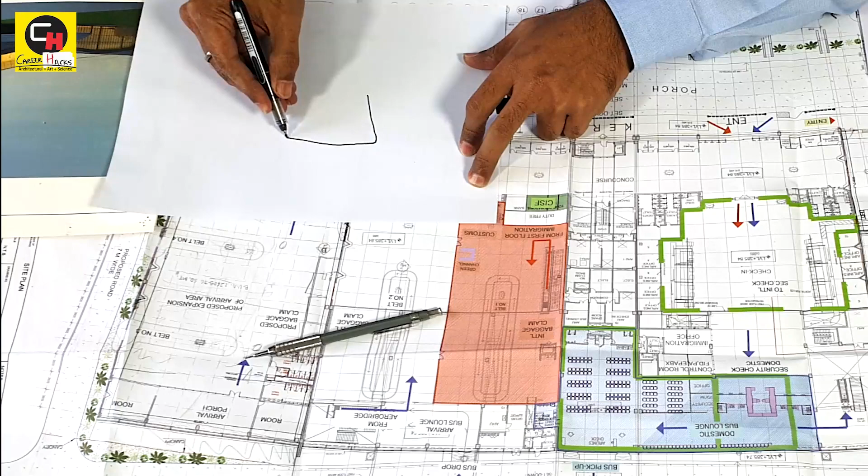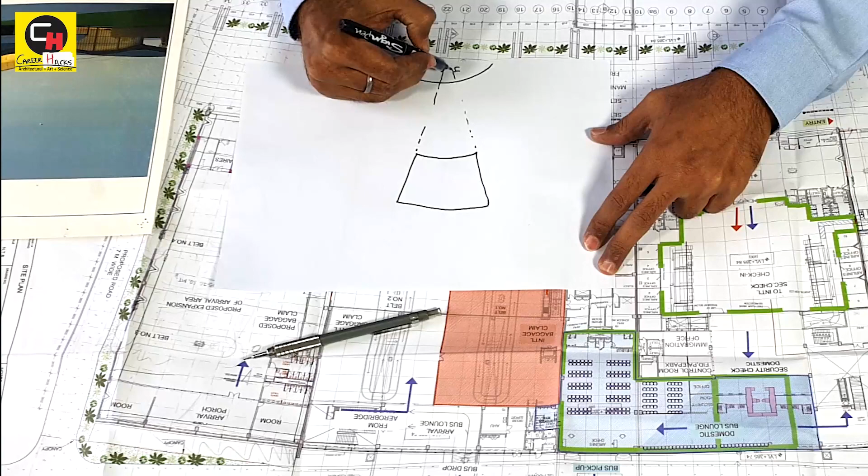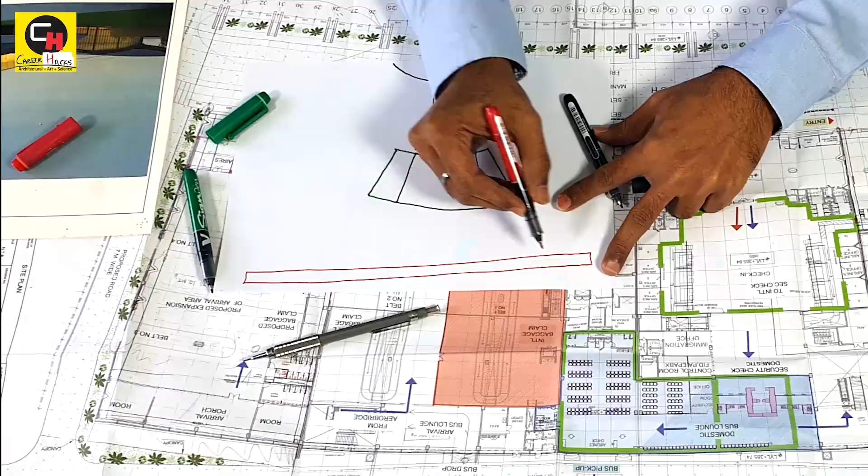building that is there. Those who are familiar with Jaipur, we have Jawahar Circle. It's a big circle right next to the airport. The center of this building, as you can see, lies somewhere in Jawahar Circle. So we were supposed to do the expansion on this side and somewhat on this side. The taxiway, or the runway, is like this, which means the landing and takeoff takes place in this part, and then the flight does taxiing like this and parks like this.

Now, since we are supposed to do the expansion on these two sides, let me tell you what is happening. Right now, the terminal building is somewhat like this. This side of the building is departure. This side is arrival, which means if you want to fly out of Jaipur, you would be somewhere in this part of the building. When you are coming to Jaipur, you are going to land or enter the premise of Jaipur in this part. And here we have got pylons and the canopy. So we were supposed to do the expansion in this part. Let me write it: future expansion, future expansion.

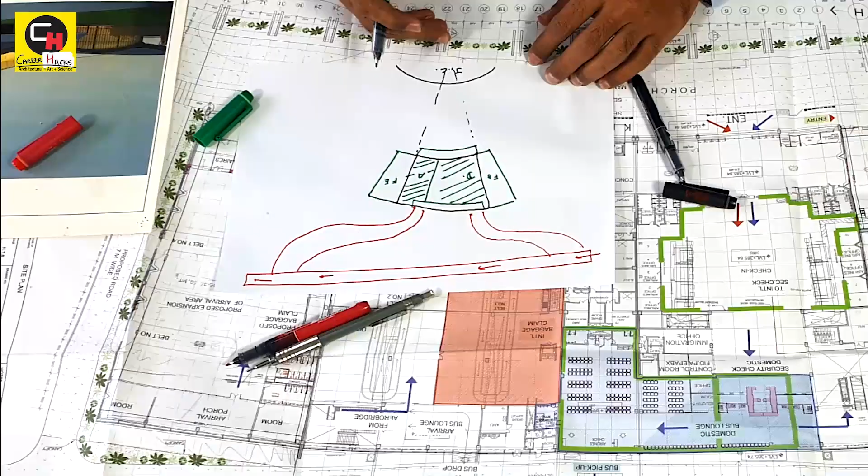Now, as you can see, the building form is slightly radial. And the expansion had to be done on the left and right, which means the arrival was supposed to come on the right side along the existing arrival, and the departure was supposed to come on the left side, adjacent to the existing departure of the building. So this was the basic format, and that was the feedback. And we didn't have to add the aero bridges, though the aero bridges are located somewhere over here.

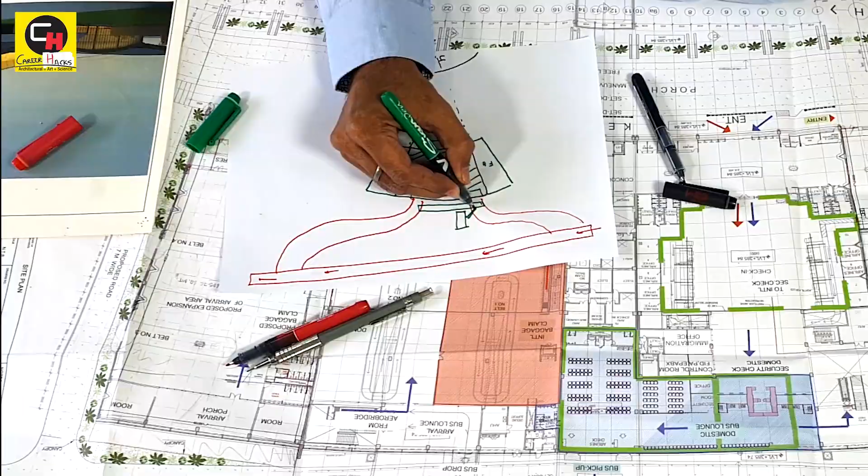An aero bridge basically is a platform wherein you can directly board the aircraft, and you don't need any bus to go towards the aircraft. So the aircraft comes and parks over here, and you can board the aircraft directly, maybe from this point and maybe from this point. So that's how it happens. I hope the basic plan is getting clear to you, what the basic inputs were. Now let me come down. This is just a planning explanation of it.

Now let me show you how the existing building is in sectional format, so that you can understand the topography of the building. This is the ground, then this side is the arrival, that means taxi drop off.

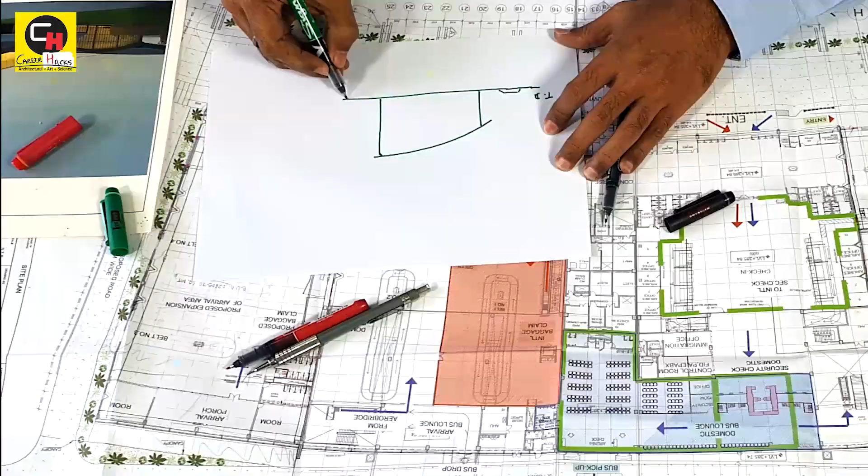Then the building is somewhat like this, and then you have the aero bridge which is standing over here. You have the ground floor level, you have 6 meters level, we call it 6 meters, and then you have the 10 meters level.

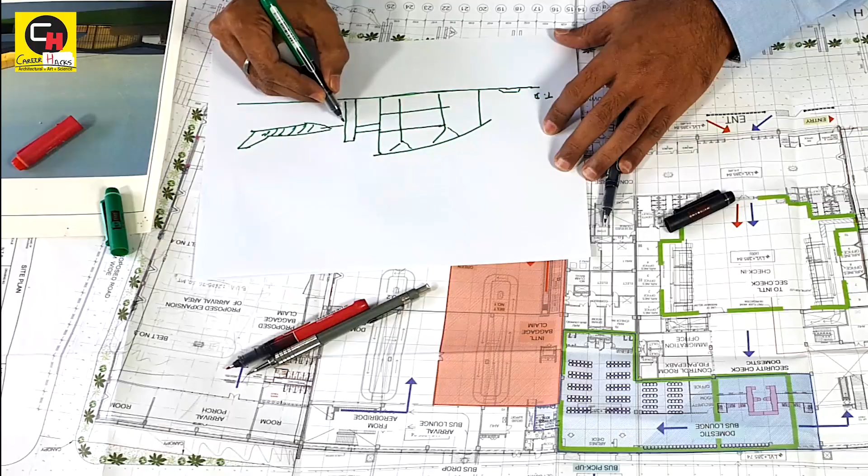So it is somewhat like this, the existing terminal, and then the aero bridge connects like this, and the aircraft parks somewhere in this point. So you board the aircraft like this. So now this is the existing setup of the terminal, and let me show you the actual plans of how the things are happening in the terminal right now.

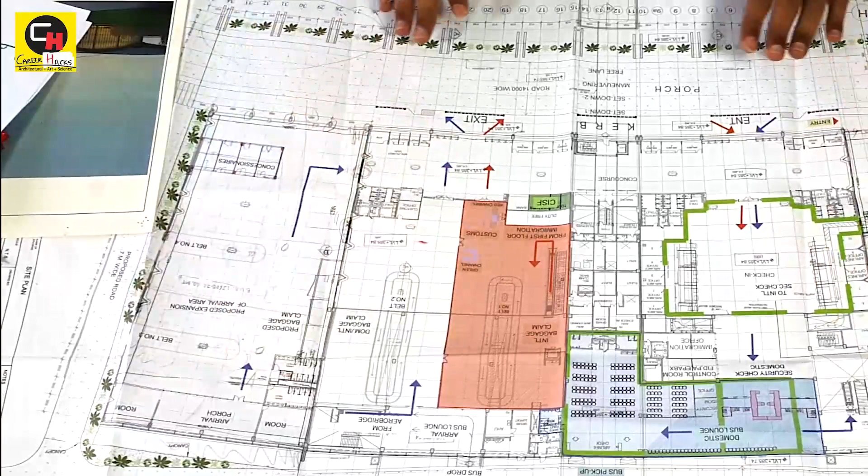So friends, this is the architectural plan of it. As you can see, till this point is the existing terminal. As you can see in this, the arrows are marked. You enter the building from here, you have a security check, then you have the immigration office, then you have the domestic lounge, and then either you get a bus pickup from here or you go up further for the actual departure or the immigrations.

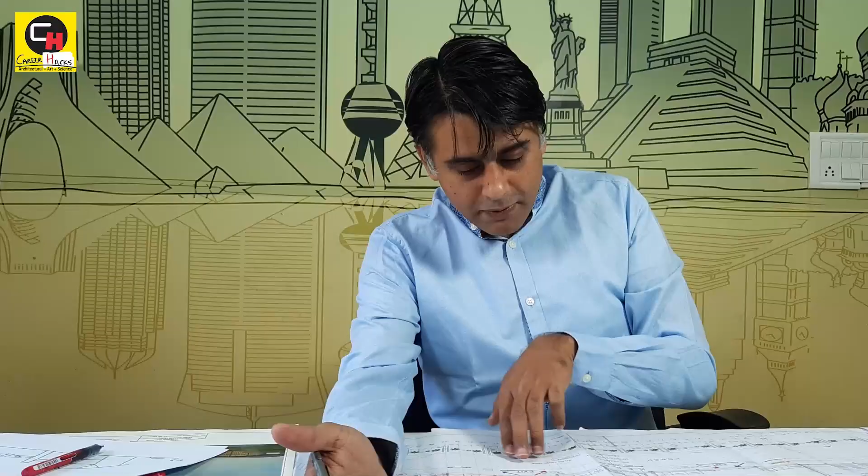Then you have the arrival terminal, which is over here. There is this one belt, there is this second belt. So your luggage comes over here and you check out from this point. So this is the exit. Now the addition to the building had to be done in this area and in this area. This is the arrival part which we designed.

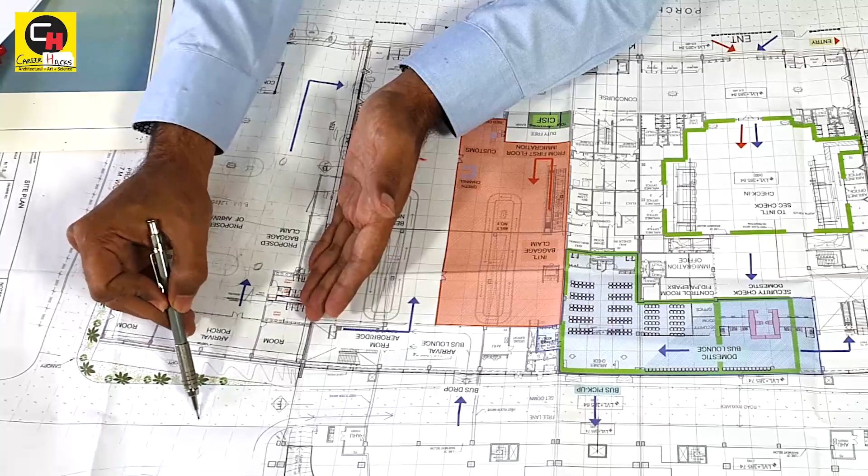So the arrival part which we designed had to have 3 belts, the carousel. So you can see the belts which are coming over here, and then you have the arrival porch. The bus which used to come parked somewhere over here. So you get down, you enter the building, as you can see in the arrows, and then you have a toilet block. You come in, either you go out from here or you enter the main arrival and then you come out of here. So there were 2 possibilities. So we had designed it accordingly.

Now coming to the departure. Departure is supposed to be in 3 levels. One is the 00 level, where we have the check-in counters, and above that we had 6 meters level, which further added to the main building, and we had a 10 meter level. In the 10 meter level, if you go directly, you were directly in a position of getting towards the security tunnel and then boarding the aircraft. So that is the basic knowledge which I wanted to give you about the entire terminal.

Now comes the actual designing of the terminal. As you can see, this is approximately, let me start in feet only, because mostly people are comfortable using feet as their dimensions. So this is around 71 meters, which turns out to be around a 220 foot linear building, which was supposed to come. And this part, though it is not big, is around 25 meters.

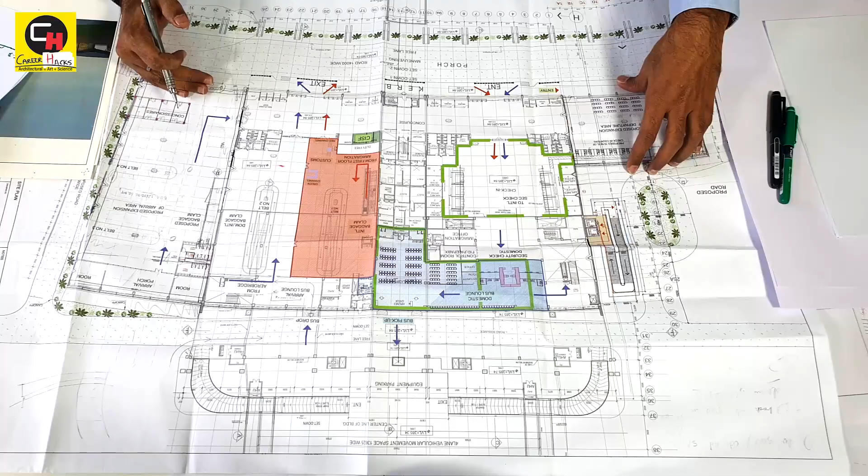So the original objective was to make a hall in such a way that least interference is there. The structure was supposed to be designed in tubular framed structure. That means we were using box sections, metal box sections, IS metal box sections, and developing the entire terminal. I had a philosophy of making a curvilinear building. So I wanted the span to be as open as possible so that once the person arrives from here, he sees a long integral building which has least interference in it.

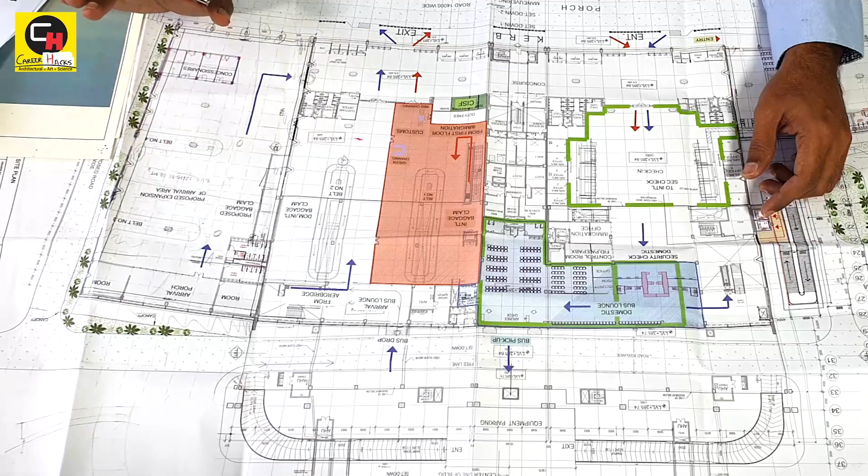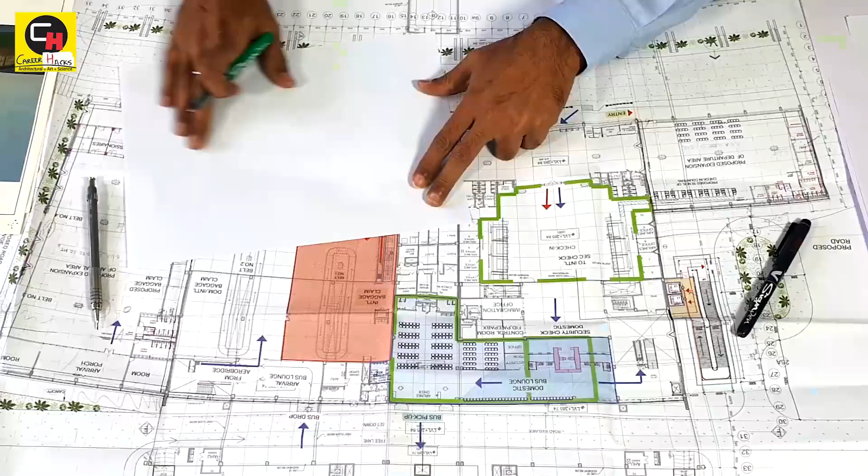So what I wanted to do was to make an absolute columnless building, but while using the tubular structure, we had a limitation that only 100 feet length could be achieved at a time. So let me come down to the sketch wherein I'll show you the concept which we did for developing the arrival. So as you can see, this is the existing terminal, like this. Now, my building was supposed to come in this area.

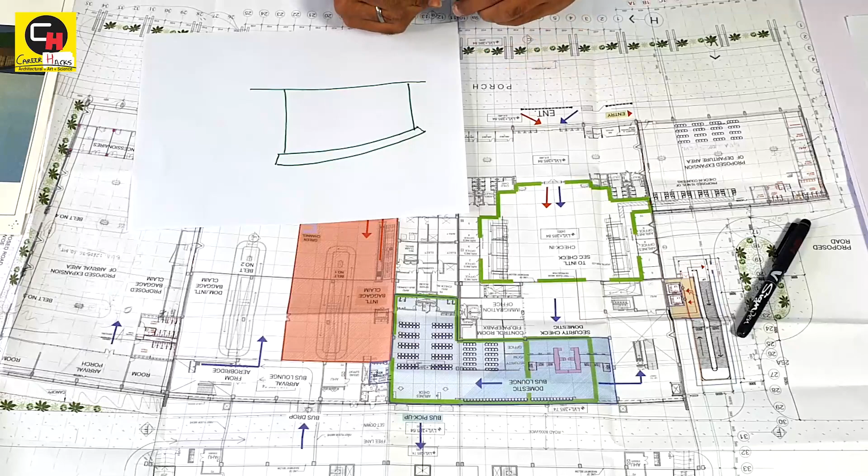What I did was, somehow when you land from the air, you always like to see a curvilinear or a fluidic building because that gives a better impact. Now, in this particular case, I didn't have the liberty of designing what I wanted, the curves the way I wanted, because we had an existing structure. So I took the formation of the existing structure and I wanted to create a separate identity of my building as well. So how can we do that?

So we took this formation, and since the height was not supposed to be that high, I did two interventions. Option 1 was a fluidic building, like this. But then this had a disadvantage, a very practical disadvantage, which Airports Authority of India told me. Once it rains, we have two collection systems.

One, the water would come down and fall from here, while the other, the water would come down in the center of the building and the water would drip like this. That was a practical problem. That water might collect over here and the building has to be in a metal, so it might start seeping from this point, and nobody wants to see a dripping airport.

So what we did was, we took a different formation and we curved the building like that, like this, and then we had a small arrival canopy, and on the other side, since we had a pylon system,

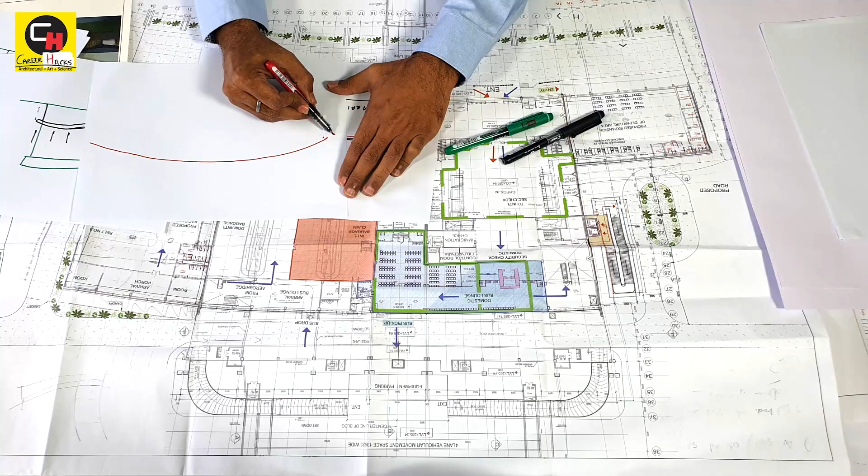Now the same case was in departure also, we had to maintain the same trajectory. So that is what we did, but we'll come to the departure in the second level. Let me tell you one more thing. This is a huge structure, and the beams, the girders were almost 1.2 meter, that is 4 feet deep at both the ends. So if this is a huge curve, and this is called the tangent. So in this part, this particular curve behaves like a straight line.

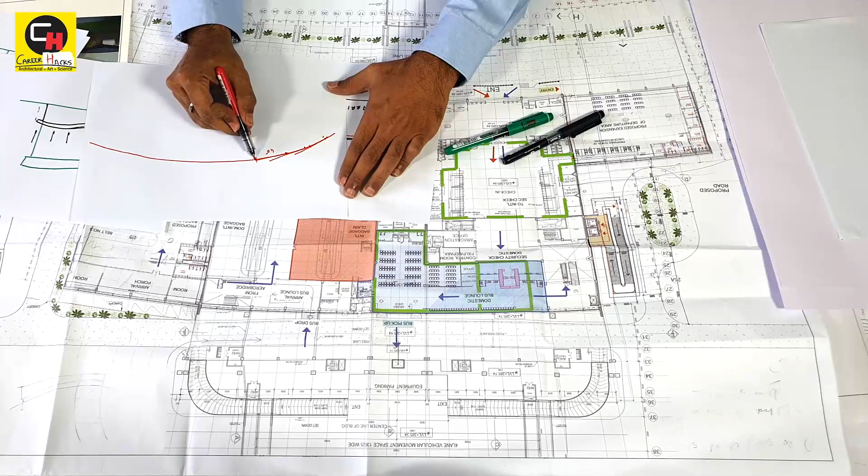What I did was, I actually managed the length around 40 feet, which is approximately the length of an individual box section. And we used straight lines like this and divided the entire curve into straight lines. So that was the basic engineering technique we had to use in this building, rather than making a single curvilinear structure, which had a technical limitation sitting in Jaipur and considering the cost constraints of Airports Authority of India.

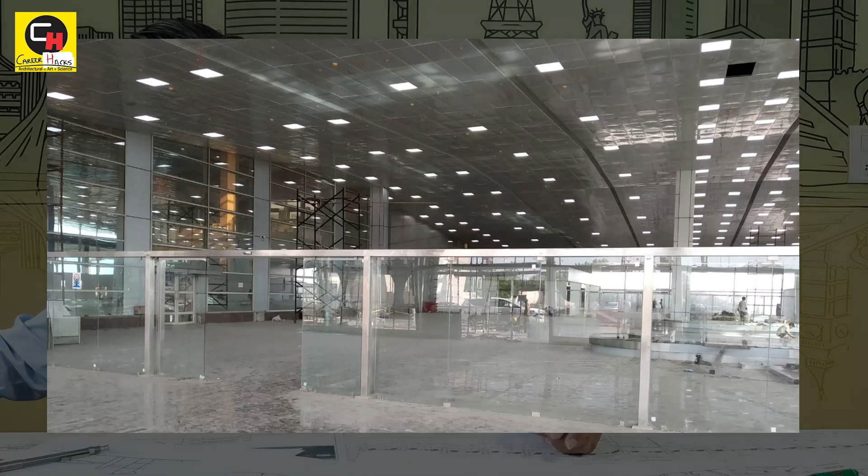So as you can see in the structure, you might feel like this is pretty straight. But actually it is not. We have used different tangential sections and placed them accordingly. So coming to the other image of it, as you can see, this is during the completion of it. The curve is starting to get obvious, and as you can see, the immense depth of 220 feet, with a single column span, around 100 feet of depth with a single column. So that's how we conceived this building.

Now the other challenge was to incorporate the other services which are very important in airport buildings, namely the HVAC, the air conditioning, the use of glass facade. The existing building had a glass facade, and we had to integrate that glass facade in this building. It had a special character.

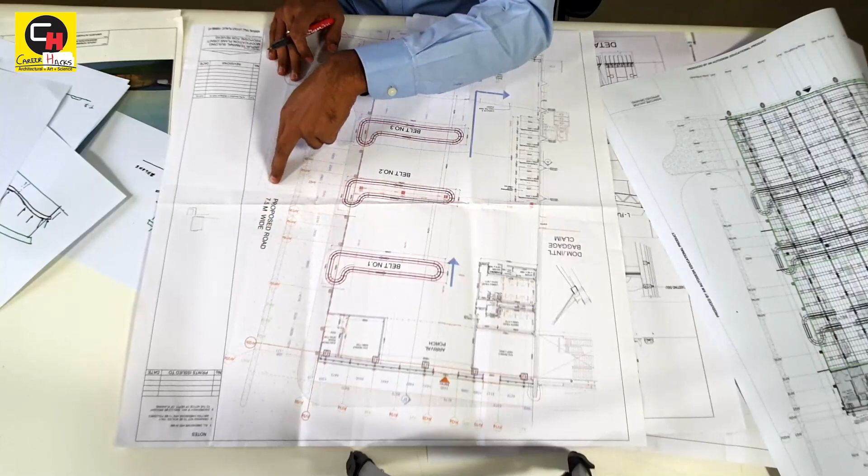And we had provided some of the concessioners. So if you are coming out and you want to take flowers for your girlfriend, you can always do that from these concessioners. And then, how does your luggage come in? So a tractor trolley or maybe anything will bring down your luggage, drop it to the respective belt, and the luggage comes over here, and the belt rotates like this. And then you can stand around and collect your luggage from here.

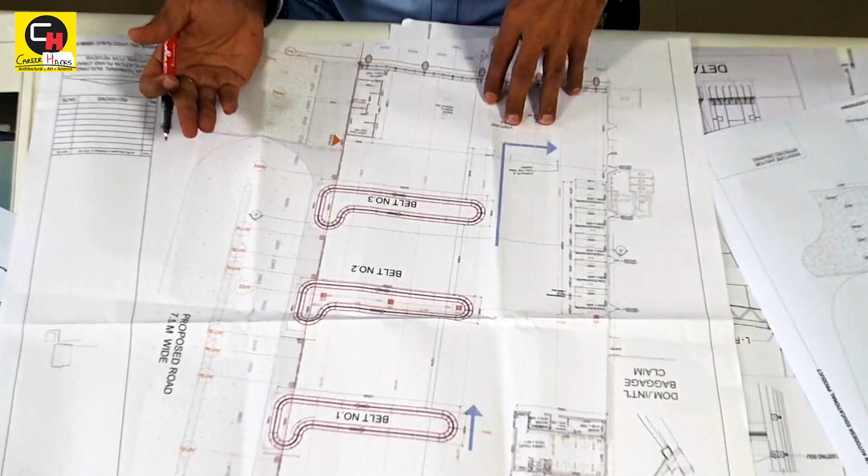Then you come out. We have a small visitor area as well, wherein if your girlfriend or your friend is coming, they can come in, stand over here to meet and greet you, and we have small kiosk counters over here, and then you come out and then you go. So this is the actual architectural plan of it.

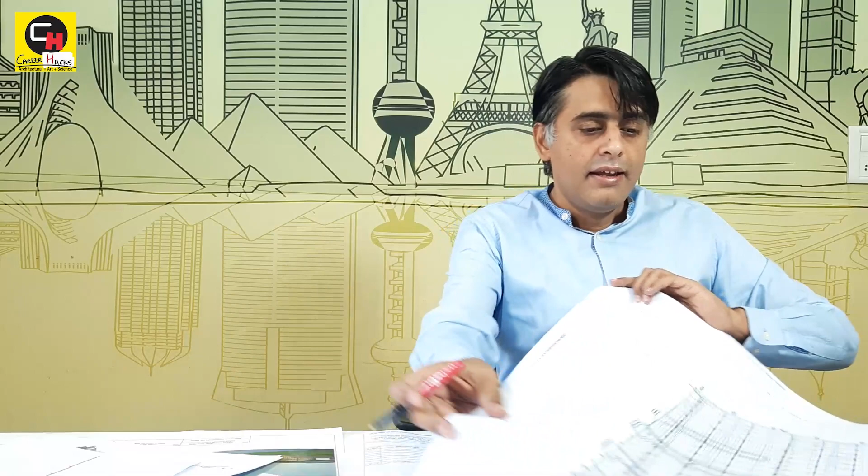Now coming to the detailing of it, the most important character, as you must have seen in my previous sketches, the roof was curvilinear to accommodate the ceiling. Ceiling in this particular case, we had taken Armstrong metal ceiling, and this was a curvilinear building. As you can see in the plan, let me put it in the same way. This is a curve. This building has two curves basically. One is in the plan, so it is radiating like this, and one is in the section. So that is very crucial.

When you design these kind of buildings, the false ceiling becomes a very tedious element. But again, there was a cost constraint. So we, however, managed to use this ceiling, but to do it in a curvilinear format was getting very expensive. Again, we had to use that tangential technique in the ceiling also. And we actually developed an indigenous way, our own way of ceiling detailing, which I'll show you in further coming drawings. So these are 600 by 1200 mm ceilings. So 600 by 1200 is 2 feet by 4 feet ceiling. So we did 600 by 1200 ceilings

after every 2 blocks, since the curve was radiating, so the building was changing its dimensions. So we started to do the ceiling from the center. As you can see in the center, this, and it keeps on rotating. But since the grid had to be kept straight, the entire difference had to be taken out in the center. As you can see, the last grid keeps on changing its formation. So we had to actually cut the tiles while placing them on both the corners.

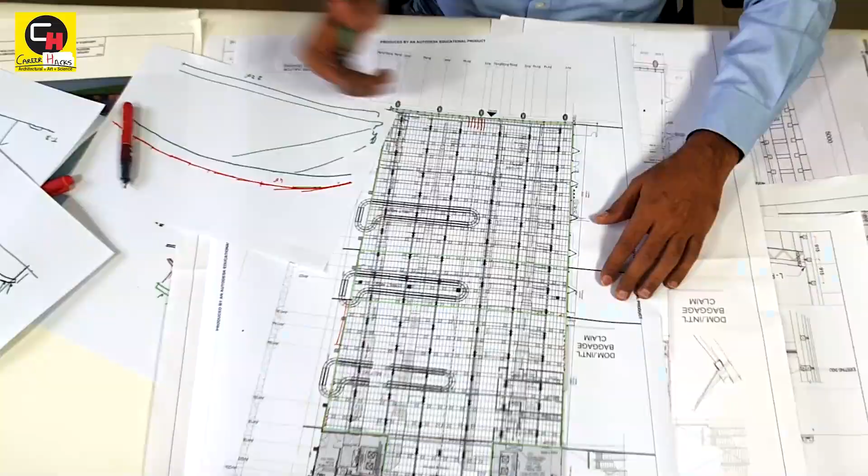Now the other challenge was to embed the air conditioning. As you can see in this particular line, you can see the ducts running. So this is first AHU. So this duct, as you can see, is coming over here. It keeps on reducing and it comes till the end. Same is the case in this ducting. So the ducts start from here. It keeps on coming like this up till the end, so that the ambient cooling is same throughout.

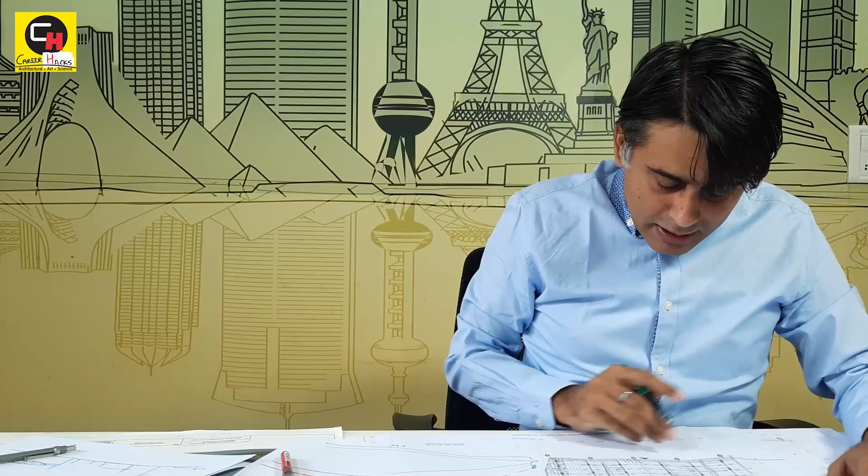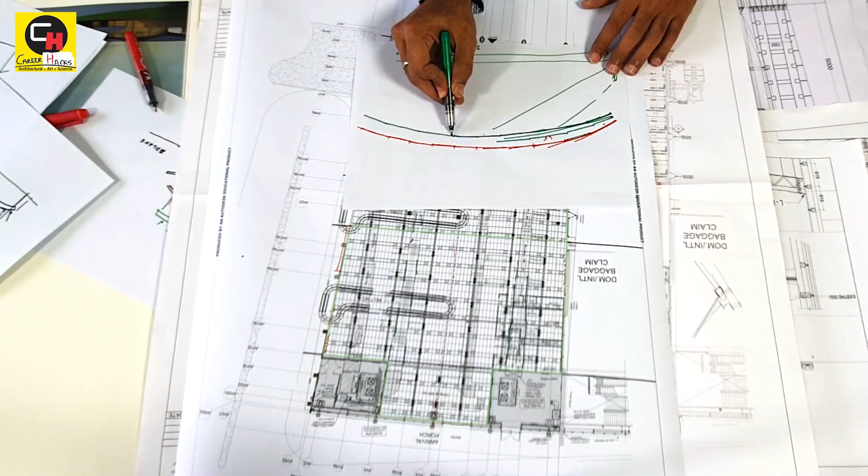Now again the problem was the curve. In this case, as you can see, the curve was there, so we had to keep the ducting again in that tangential aspect. So this is how we placed the duct. And the grill, again the grill can't be curved, so we took 10 feet grill pieces and we placed them in the tangent. So the grills were straight, but while arranging them, they look like a giant curve.

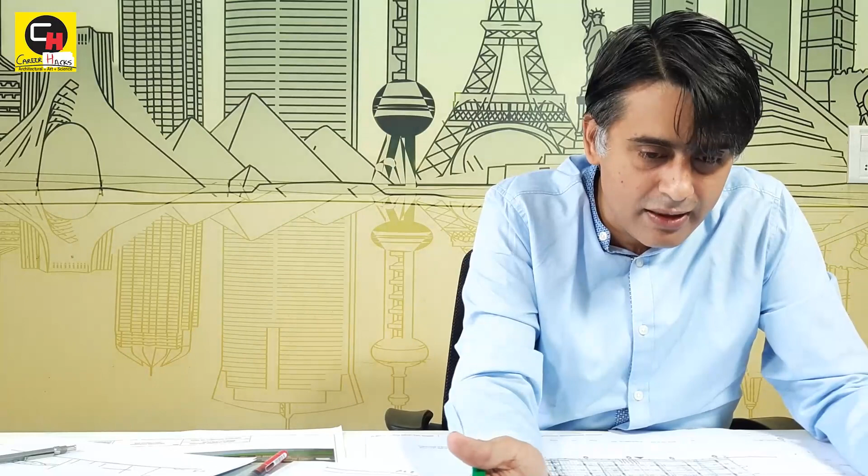So as you can see in this, we had a linear pattern of diffusers from which the air comes out. This one, this one, this one, this one. And here we had alternate grid pattern, actually, the grill pattern. Here we do the throw and here we collect. In the same case, here we do the throw, here we collect. Here we do the throw and here we collect. So that is a complete cycle. In HVAC, we have to maintain this cycle in order to keep the temperature of the air less.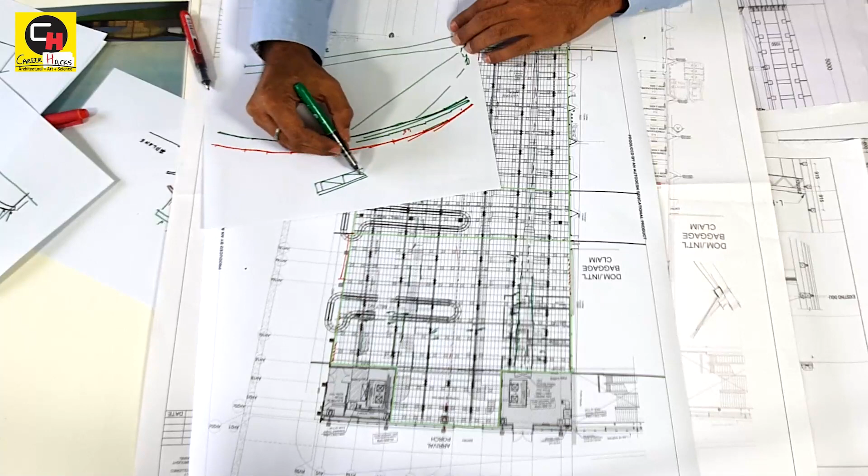Then comes another important part. This ceiling had to be insulated in order to reduce the heat load. So how do we do that? So the metal structure, as you can see, the truss. And in the top, we did the layering of glass wool and heat insulators.

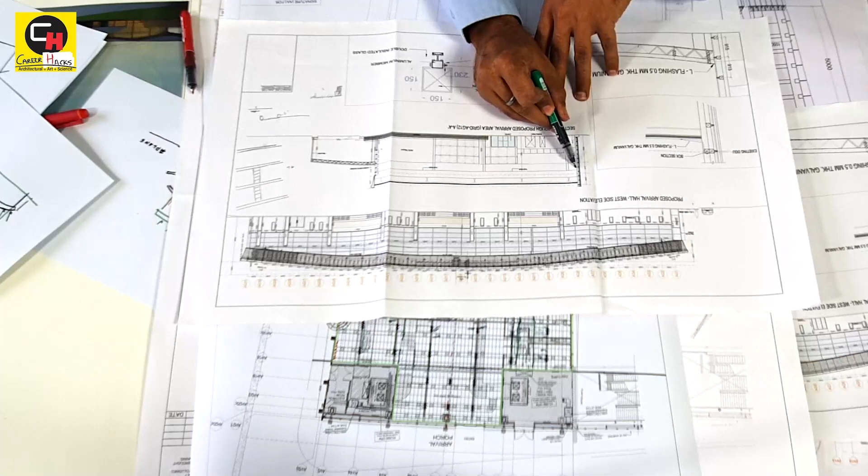Okay. So this is the main section, and you can see the metal structure going like this. And in this building, this is a transverse section, as you can see the ceiling over here. And we have this truss coming. We have the glass box section and the ceiling on top of it.

And this is the glass facade. I'll come back to the glass facade very soon. And this is how we executed the ceiling. We had this L flashing with 0.5 mm thick galvalume sheet and the heat insulators, and then the main box section. And this is how the curtain wall comes in.

Now this is the external facade from this carousel side. It is somewhat like this. So we have these luggage belts: one belt, the second belt, and the third belt, which goes around and which collects the luggage.

So to give that kind of perforations, we did a 3 meter high wall, and above that, this was actually the south direction. So we had to use a double glass unit to reduce the heat load. So in this case, we used a double glass unit on the south side and the west side to reduce the heat load.

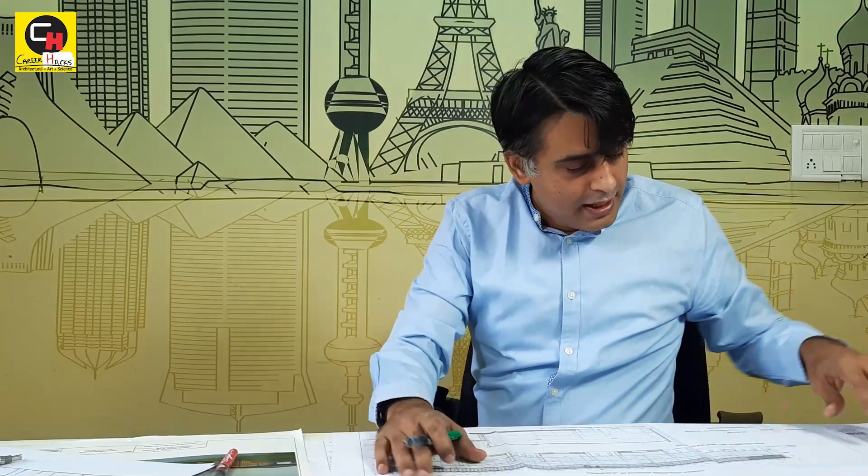Now in this particular section, you can see how the double glass unit fits in. A double glass unit is a special unit wherein we give an air gap and put two types of glass. The outer glass generally is heat reflective glass or transparent glass. The inner glass is generally a transparent glass in this case. So that is the basic structure of it.

So friends, now I'm going to explain the facade of this building. It is very important to design this kind of complicated facade. So before giving you the design of it, let me explain the sketch of it. In this particular case, on one side, as you can see, the height of the building.

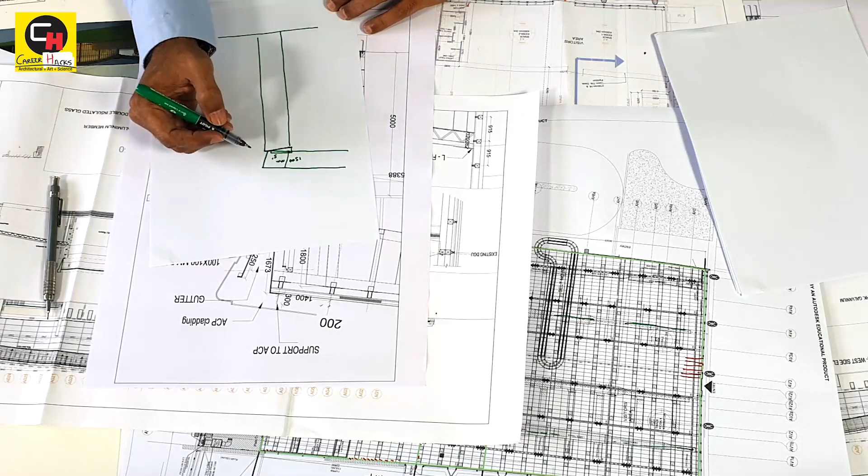So this is the truss which is coming, which is around 1500 mm or 5 feet. And then there is a base plate in it. And then you have the main column, which is around 1 meter. And we have to cover this entire setup. And the building continues further.

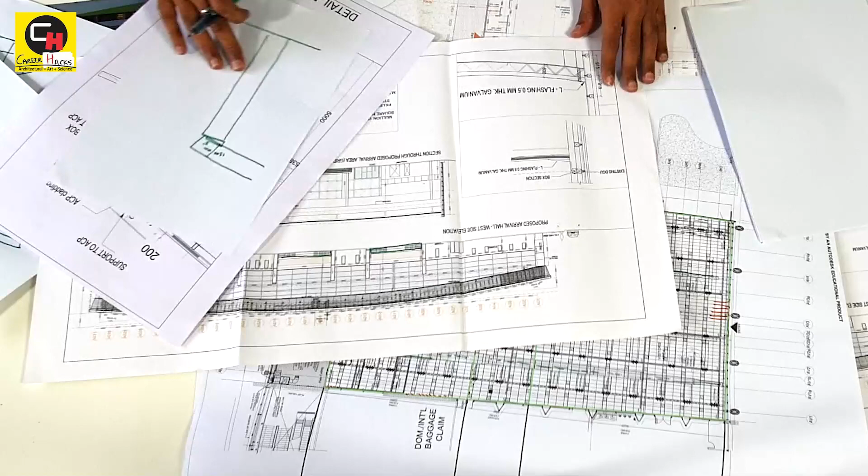As you can see over here, this is the pillar, this is the glass. As you can see, there is a metal structure behind it. And then we have an ACP wrapping. And if you see the front facade of it, one more thing, this is the ACP wrapping and this is the main column.

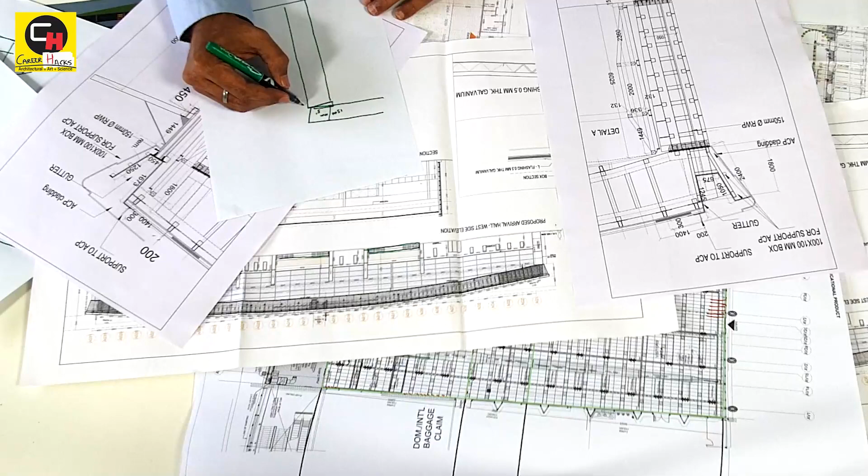Now comes the important thing, which is putting the glass facade. So this is the main structure of the building. The glass facade has to come out of the building. So let's make the glass facade. So first, this is approximately 5 meters, and this is approximately 6.5 meters. We have to cover this entire thing. So how do we do that?

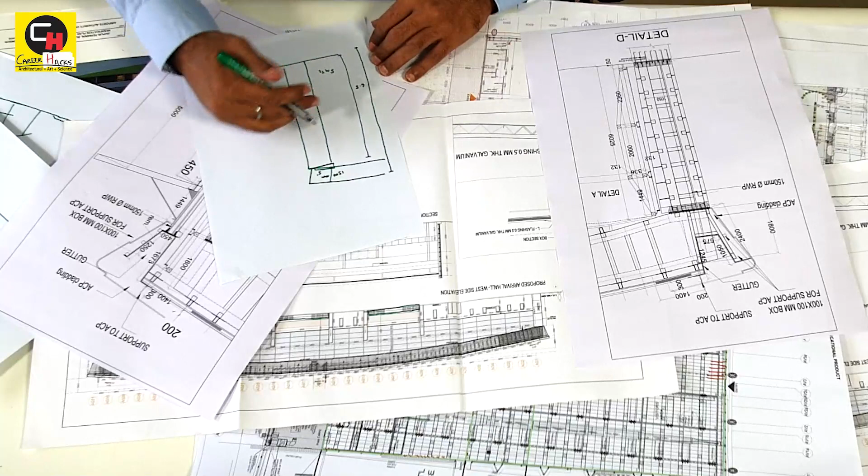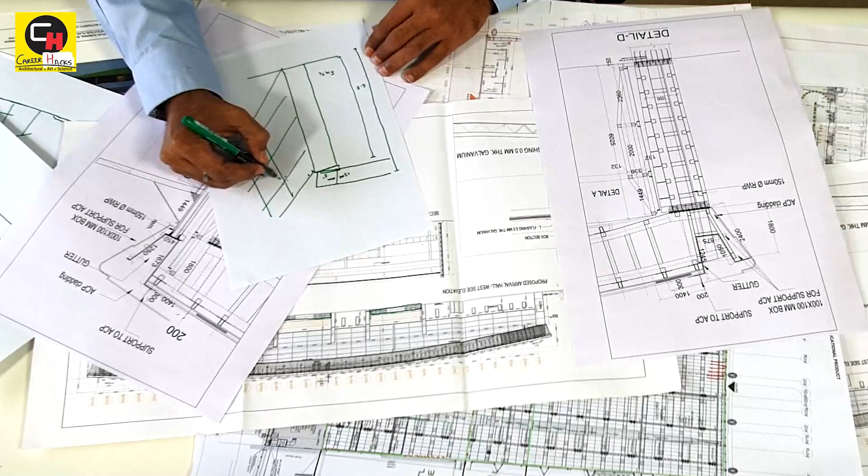So in case of the front elevation, we need to put glass. But this is the main part of the structure and this expands in a different ratio. We can't put the actual glass facade onto it. So what do we do? We create a separate element of the entire glass facade. So at a small distance, this is how the glass facade would come in. But we will have to maintain a distance from the main structure.

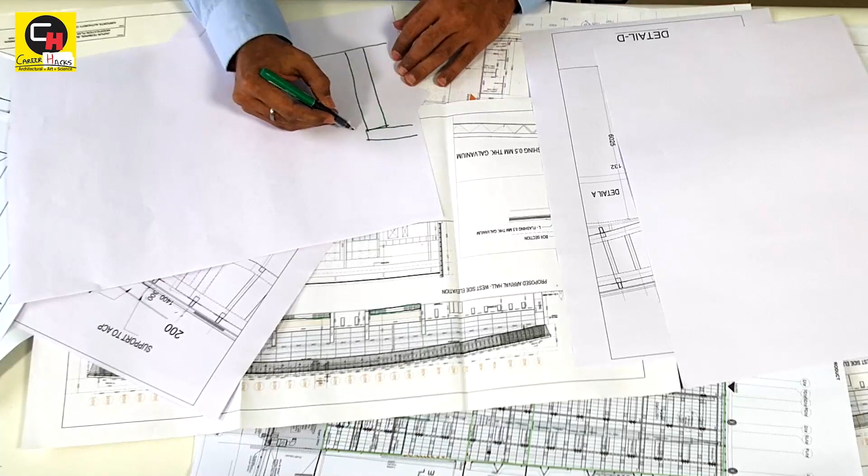How do we do that? That is how we do. This is the column. This is the main structure. Now, in front of the main structure, we introduce another facade element, another structural element, and we connect them. Let me make a fresh sketch as this has become a little untidy.

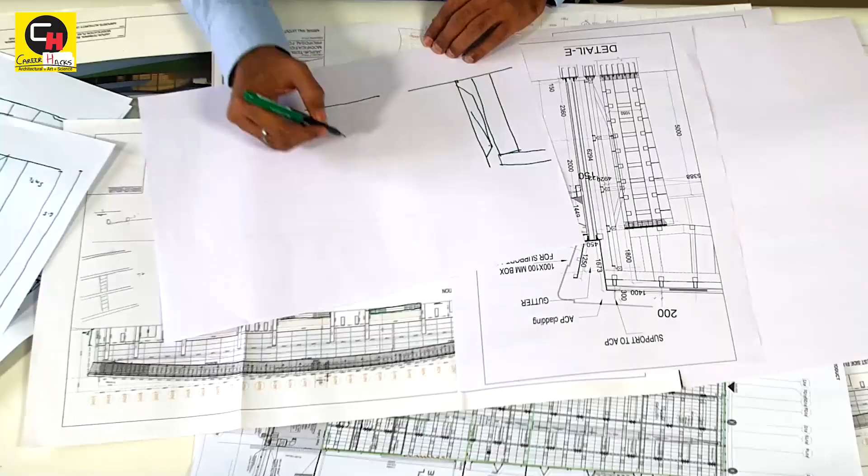First make the fascia on which the facade would stand, this, and they are connected. These are all box sections basically. So at every 1.2 meters we give support to these, because this is approximately 7 meters high, and this has to be given lateral strength as well.

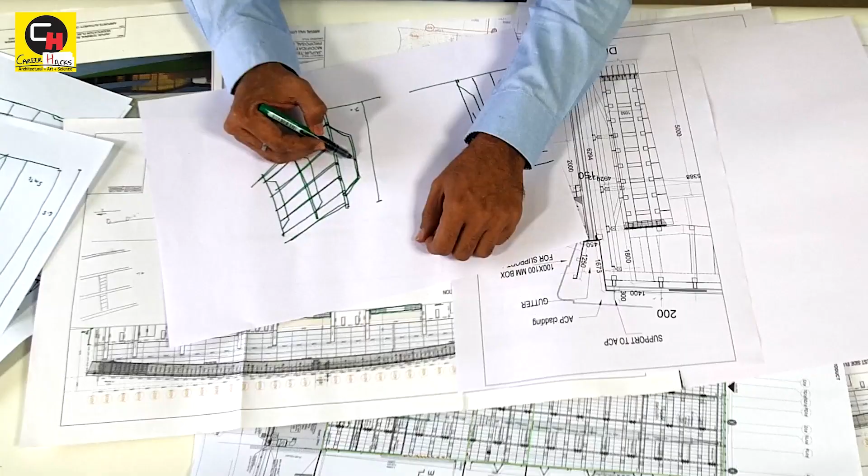So this continues. So this is one element, then comes the other element, then comes the other element. So this thing is inside and this is outside. Now this joins like this with horizontal elements, and to maintain a slenderness ratio, we provide a rear support like this. So once we do that, this stabilizes, and this is further stabilized by horizontal elements, and further they are connected like this.

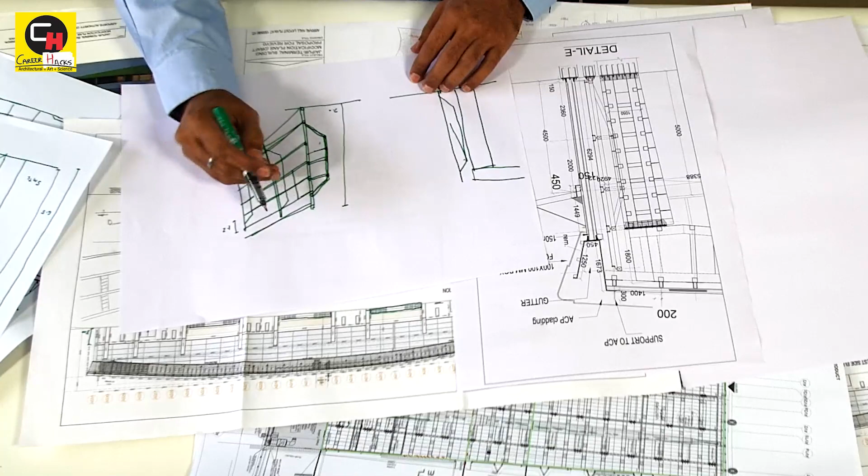And then, since this is 1.2 meters, we start placing 2.4 meter glass. So this becomes one of the glass panels. This becomes a glass panel. So if you studied about glass, it generally comes in a module of 1.2 meters by 2.4 meters, that is 4 feet by 8 feet. So this becomes one glass panel.

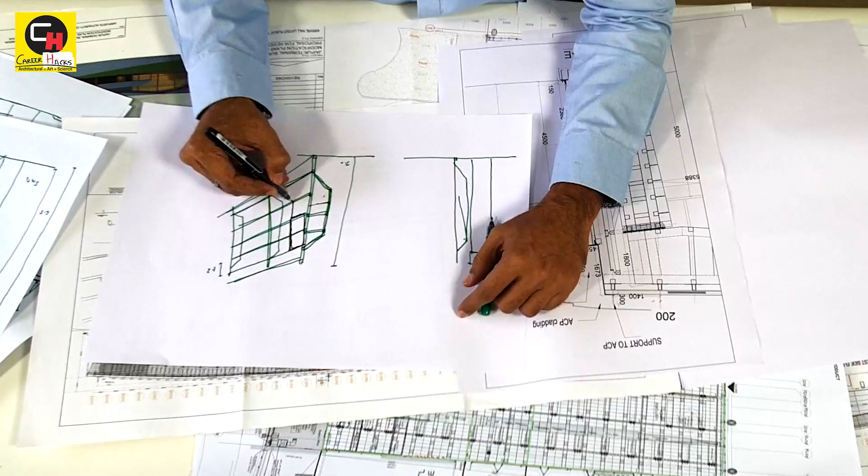Then what do we do? We have put these glass panels, and we are getting support at every 1.2 meters. So we put the spider fitting, and these spider fittings are supported on the metal structure. Alright, slightly tedious drawing, but then that is what architecture is all about.

Now let's come to this sketch. This is the main column, as I told you previously. It is supported with a huge foundation which is coming at the bottom, and then again a foundation for our external glass facade. So this entire thing, let me use a different color pen.

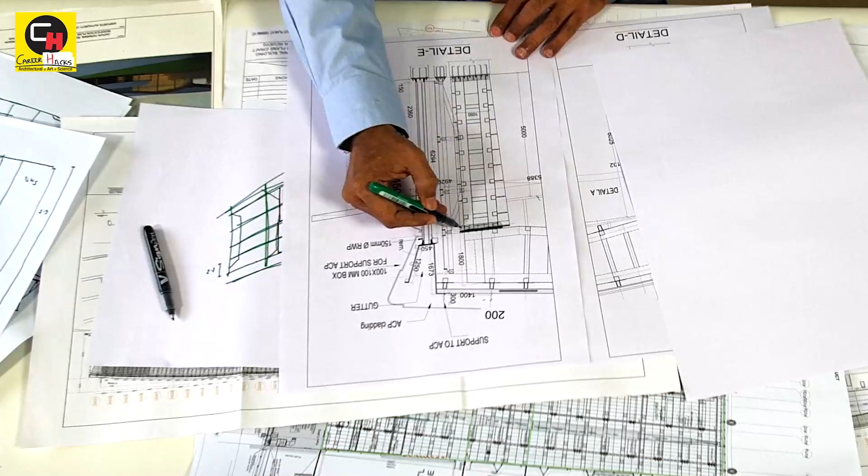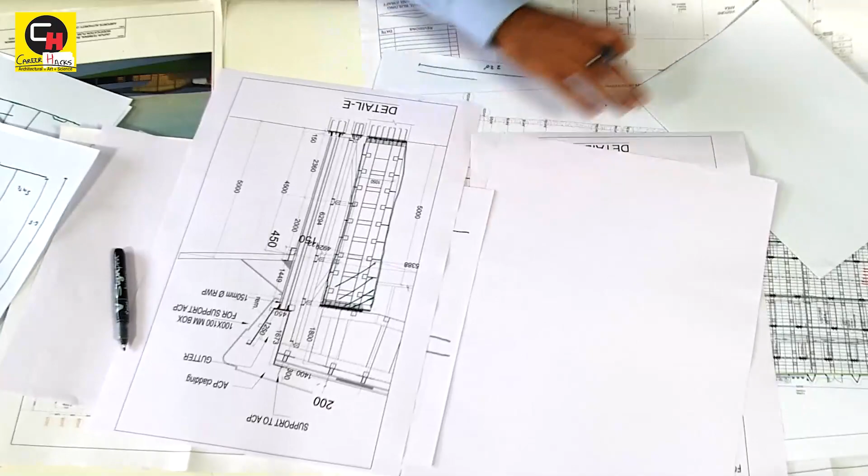This entire is the metal structure, and this particular element, let me show you the plan. One is over here, one is over here, and it is happening over here. So these are the main structural elements, and in the center we have these structural elements which are coming over here. So the entire structure spans like this.

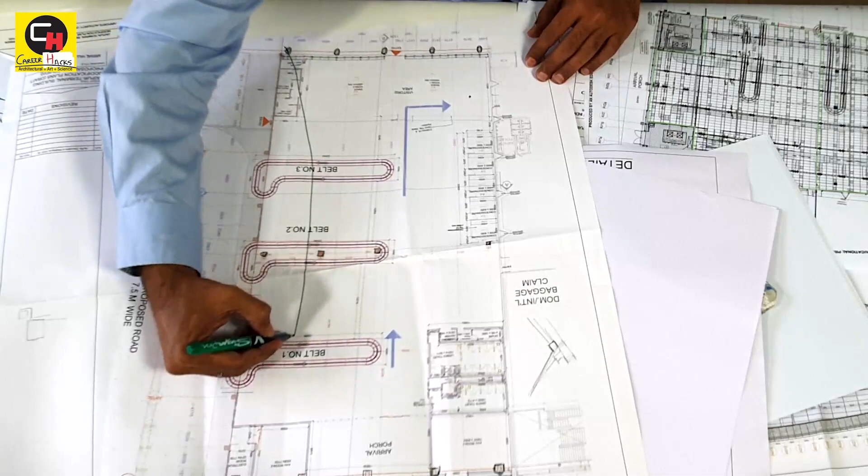I think you must be getting the understanding of the structure now. So that's how it continues. So these are the main structural elements, and in the center we have provided the support to the structure, so that gives you a span of almost 110 feet here and 110 feet here.

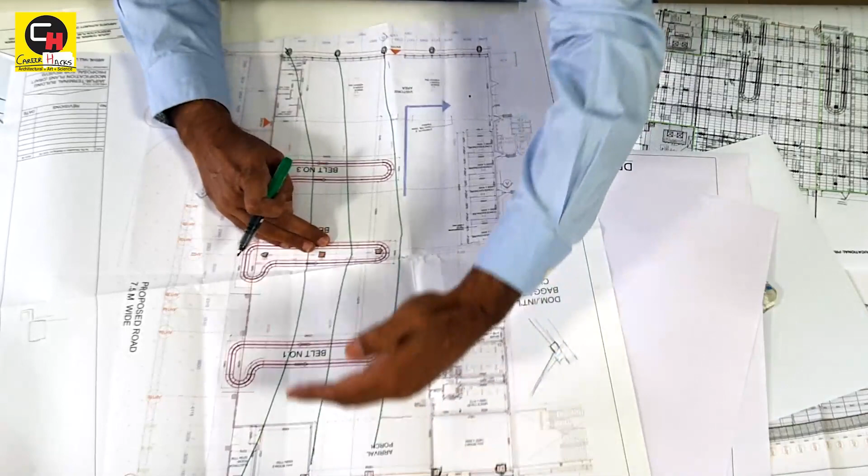Okay. Now coming back to the steel element of it, the external glazing. So this entire element is a straight member which supports the glass. This is the glass, as I told you, and this is the spider fitting. Alright, so that is how we fix the main structural element with the external structural element and the glass above it.

And as you can see, this particular profile, this is the ACP cladding, and this is the actual covering of the terminal building. So this is the glass covering, this is the roof covering, and this is the roof element.

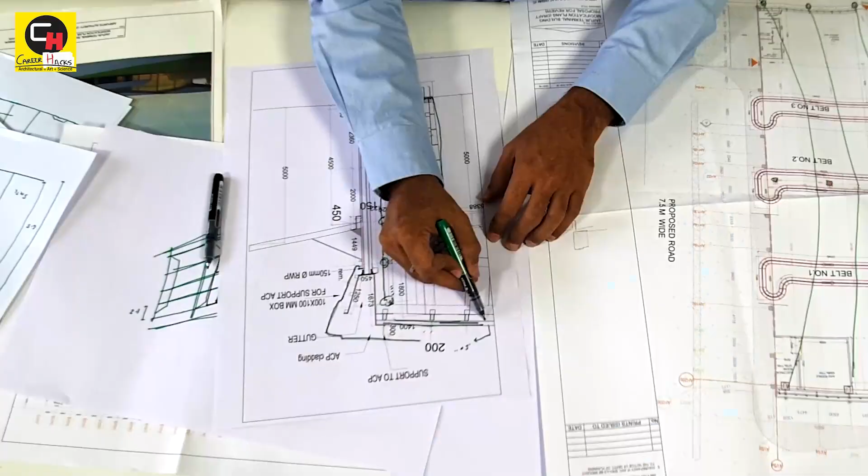On top we have 0.5 mm galvalume sheet, and then we have heat insulation of glass wool, and then again we have a metal sheet. That is basically a sort of sandwich panel, we call it, and then we have the main structural purlins, and then we have the main rafter. So that is the entire structure, how it sets.

And as you can see, we have given a gap between ACP and the roof. This is provided because the water is going to fall like this, and it will flow like this. It will be collected into this drain over here, we call it gutter. And then the water drifts from the gutter to the underground piping system and it comes out.

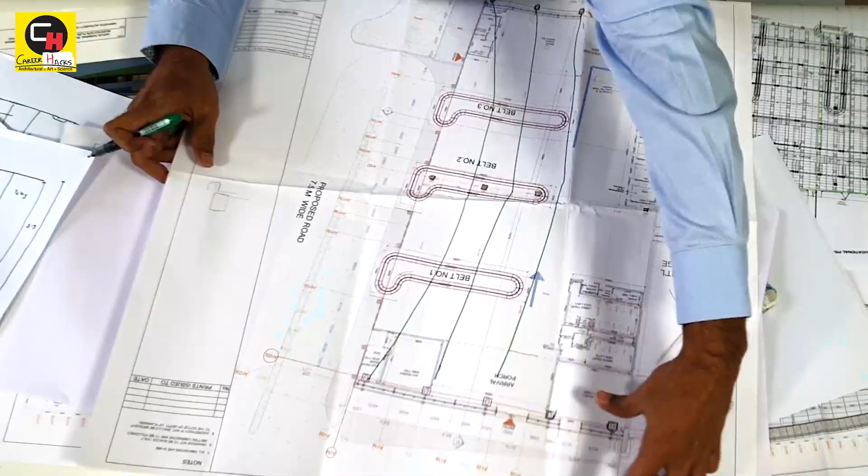Now this particular section is of the airside canopy. So we have two things. One, the water is falling over here, and one, the water is falling on this canopy right over here. So we have two collection points for water. One is the top. In the top, the water collects. It goes into this artificial facade which we have created, and it goes inside the gutter.

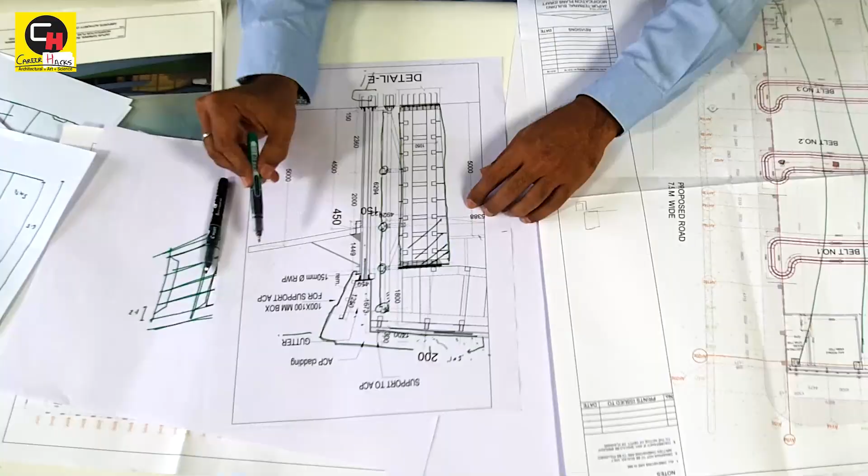And the water which falls over here comes down over this point, and there's again a small gutter which we have provided. Water comes in this, gets collected into the main pipe, and it goes down. So that's how we take care of the extreme rainwater which falls, because if the rain is falling at a speed of 1 inch in 1 hour, it will be a huge water collection.

So we had actually designed the entire pipe on the basis of that calculation for the extreme rain loads, so that it doesn't fall short and the water doesn't overflow. So that's about it. So let me show you the final outcome.

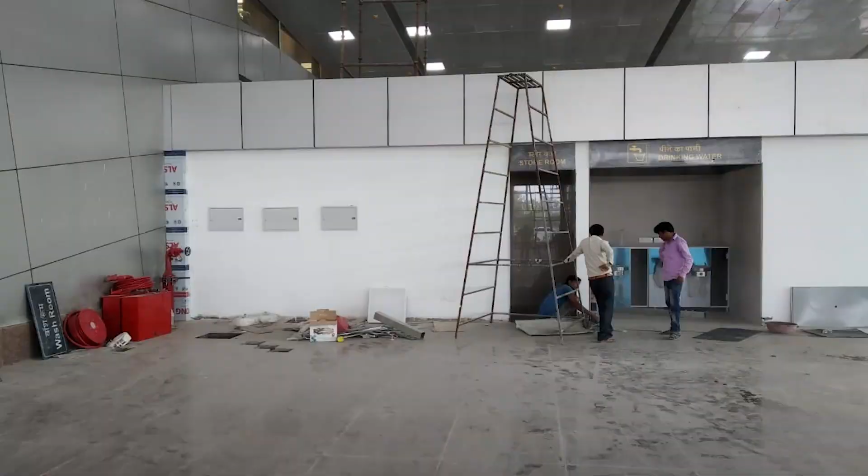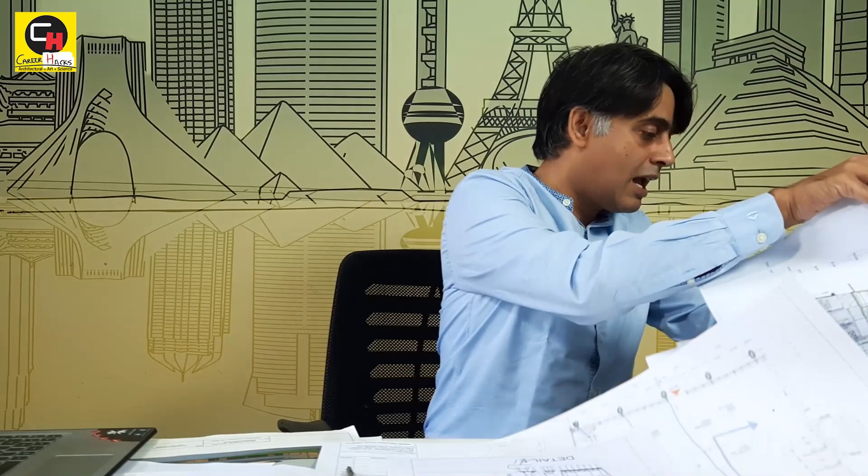The curvilinear effect which is coming in the building. Though it is not curvilinear, as I told you, it is a tangential straight line structure. Okay, so I'll not take further time because the technical aspects have been covered. I'll just give you a glimpse of departure, and we will culminate the entire discussion.

This is the arrival we have already done. So let me show you how the departure sits in. So this is again the existing terminal building, and here we will be connecting the departure as I showed you in the sketch previously. Here you enter inside the building, then you have the check-in counters.

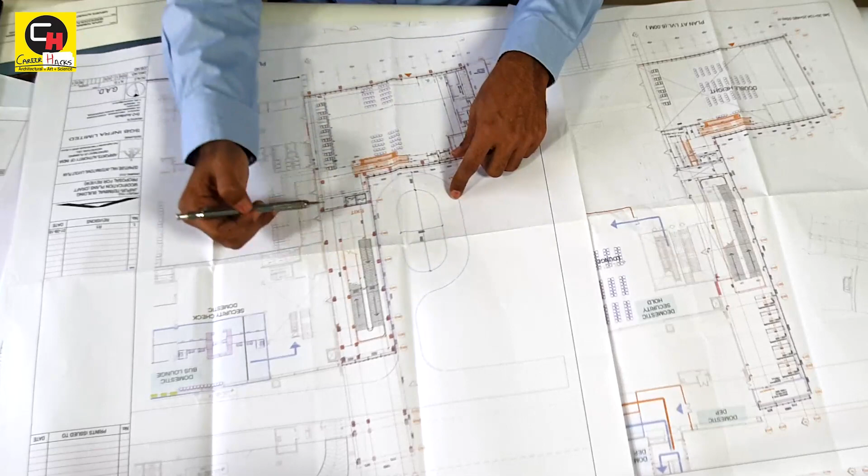Then you have the staircase as well as the escalators and a lift in case we need it, and then we have a ramp which is taking to the upper levels. Although the staircase and the lifts are taking to the upper level, this particular one was available before the expansion, so we actually covered it.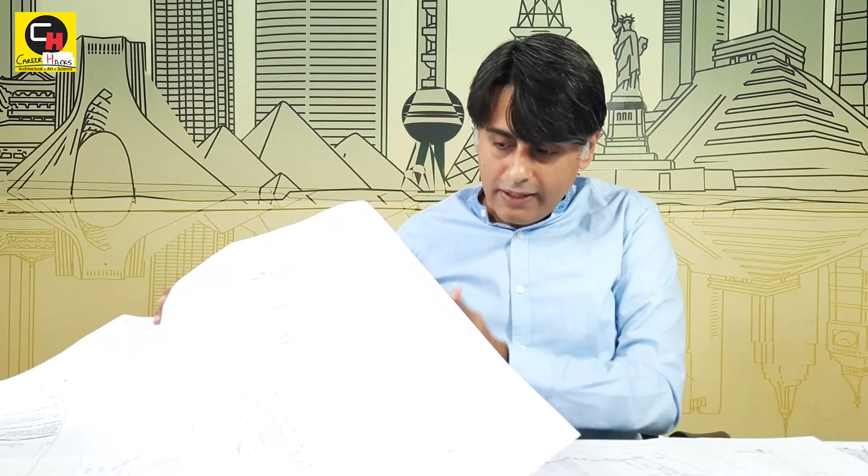And this was a 0 meter level, as I had explained to you further, and this is the 6 meter level. This plan at 6 meter level, where you can see the concessionaires, the shops, and the connection to the main terminal. And then I'll show you the 10.5 meter level plan.

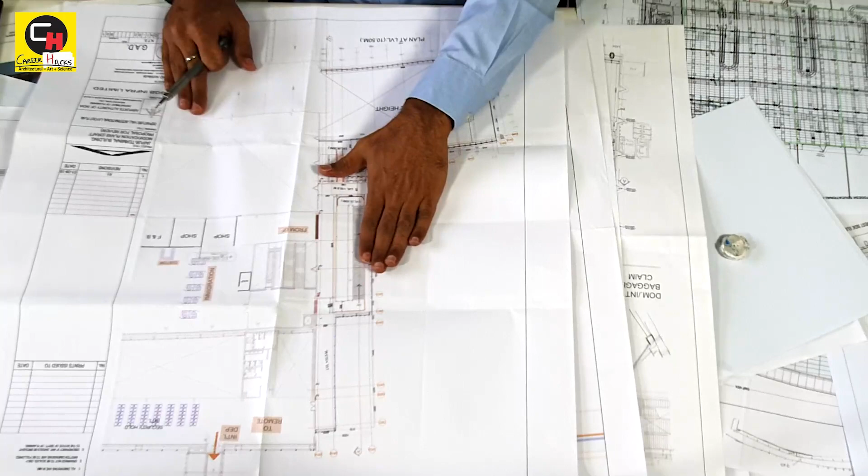So this is the 10.5 meter level plan. In the 10.5 meter level, we just have the connection to the security hold and international departures. So in this particular way, the connected departure can serve the international departures, the domestic departures, any way it can be used.

I'll briefly run through the RCP plan, as again in this particular case the RCP plan is very critical. Again, the building, as you can see in this, is radial. So we have this straight line, but the building, as I told you before, has a center somewhere in Jawahar circle. So this diverges. So these lines converge to a center point somewhere near the Jawahar circle, and this is the end point of it.

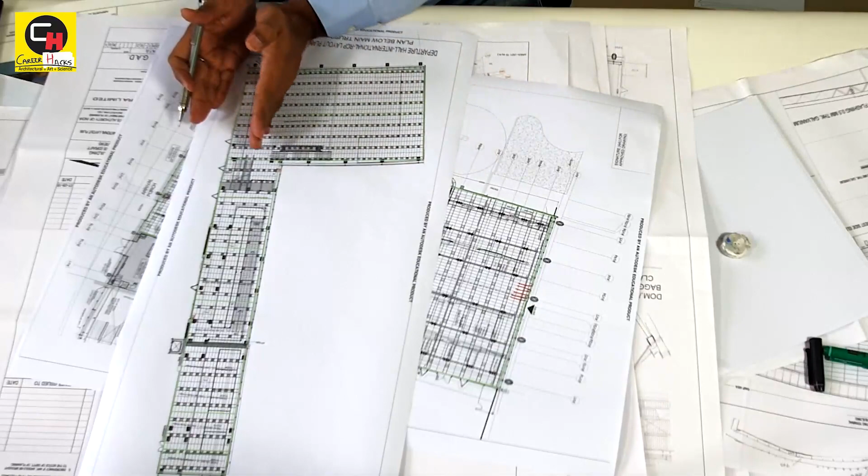So in this particular case, the ceiling, we started from one end because the building is changing its formation. The building in the first area ends over here and it continues. So we didn't want the cutouts to appear in a smaller gap as in the case of arrival. So we started from one end, brought the differences to this end and continued this structure further so that all the differences of the ceiling could be taken out at this end. I hope you understand my point. Okay, so that was much about the ceiling.

I'll show you a lateral section, a longitudinal section of it. So this is the city side and this is the air side. And in between, as you can see, we have a bus drop-off which is connected further. So here you can see the check-in counters. This again is the glass structure. This is the metal column structure. This is again the truss we are talking about. And this is again the same profile we are maintaining throughout the terminal building.

And then these are the concessionaires which I had shown you. And this is the ceiling details which we had incorporated in the terminal. Here you can see one more thing which is very important. This is the 6-meter level. The staircase goes up to the 10-meter level. And this is the ramp which is connecting the entire area. This is the concessionaires area. And that is how the building trajectory is.

Again, in this particular case, the ceiling was very important. So we again used the tangential. As you can see, the ceiling is divided every 12 meters. So for 12 meters, the ceiling runs straight in a curve, in a tapered format like this. And then it changes its trajectory slightly over here. So these are the axiom connection points. So what axiom helps is, it changes the trajectory.

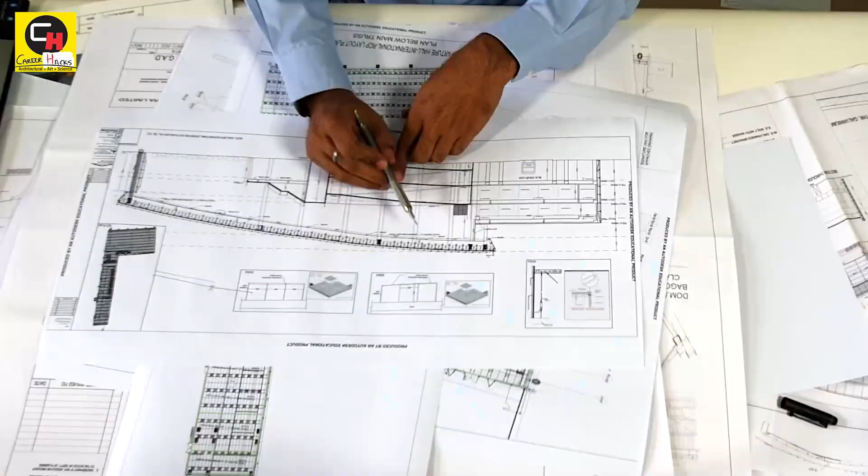As you can see in this, it is 12 meters long, and then you put an axiom over here. You again put an axiom at a slightly different angle which is needed, so that it changes the curve trajectory. I hope you understand it. So at every 12 meters, we put axioms and we change the trajectory of the curve as needed. So that way you make this straight profile appear as a curve. So that is quite an interesting engineering technique which we used to reduce the cost of the structure. I hope it is very much clear to you. That's how it is.

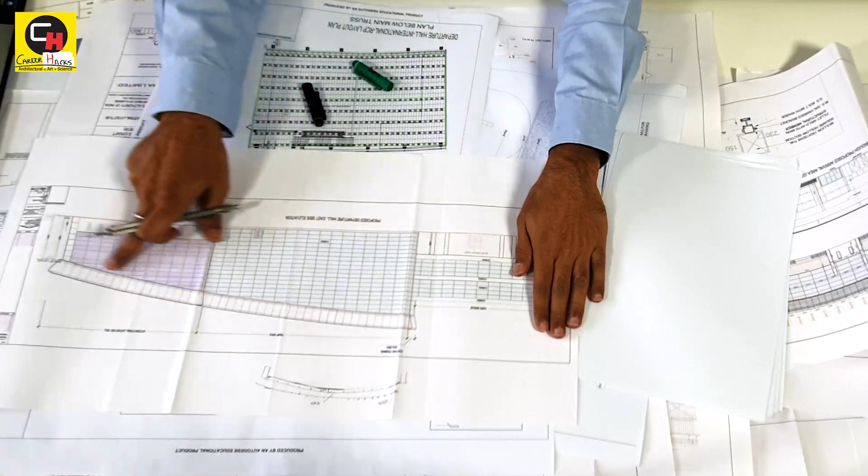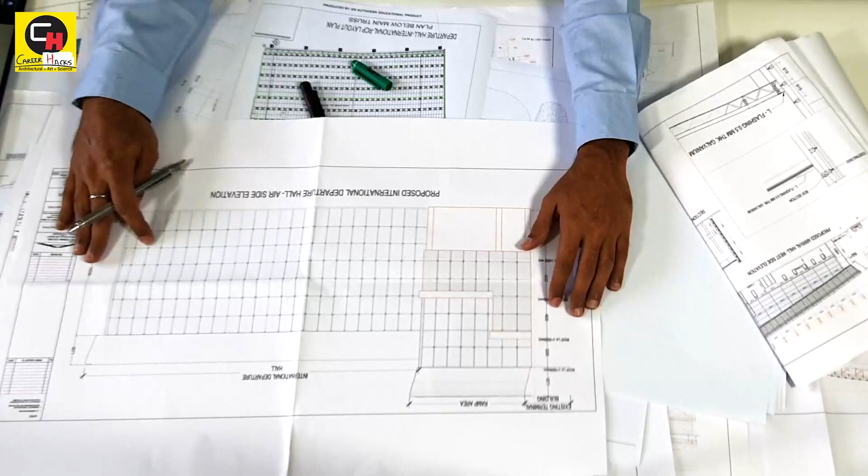Let me show you the side elevation of it. This is the side elevation. As you can see, the ACP coming in, and then the double glass unit facade coming in, and then the bus drop off, and then the overbridge. Further on are the Aero Bridges. So this is how it looks from the air side. This is the airside facade. Let me show you a couple of images and then we are going to close up our presentation.

Friends, this is pretty much what I wanted to explain to you about the airport design. I hope you would be able to get quite a good understanding, and for the students who would like to do a thesis on the airport, you would be able to understand the basic functionality of an airport, how a building is to be extended, how the circulation takes place, what the check-in counters are, and how the arrival terminal works. So I think you must be getting a very clear picture.

And for the young professionals, budding professionals, I have tried to give you a basic idea of how the air conditioning is added to the building, or how the curtain glazing facade actually works. I tried my level best, but we have time constraints, so we will culminate the video here.